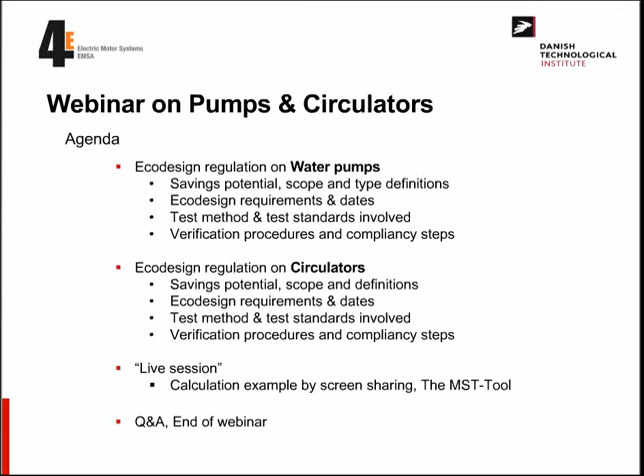As said, this will be on pumps and circulators, Ecodesign, and so forth today. The agenda will start on water pumps, talk a bit about the Ecodesign regulation, what's been regulated so far, and how we actually do compliance testing, at least in my part of the world, in Denmark, where my company has done a lot of compliance testing on motors, pumps, fans and so forth. I'll demonstrate how to perform it, both for water pumps and circulators, which are two very different things. Finally, I'll try to illustrate an example on the motor systems tool, live sharing my desktop session, which we hopefully will succeed with today.

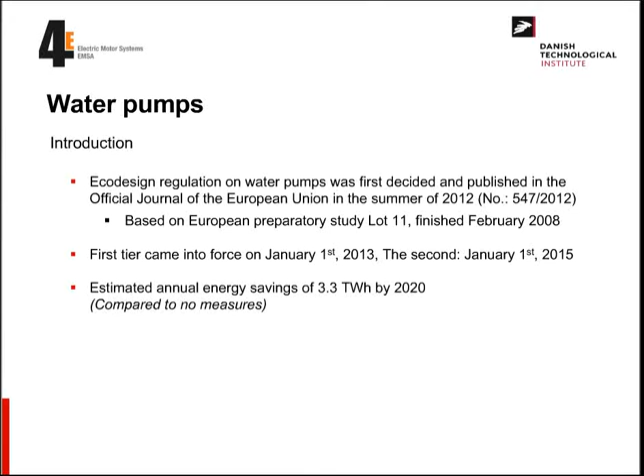From the preparatory study, we expect something like 3.3 terawatt-hour savings in 2020 due to these measures, if we compare it to no measures at all. And...

Another important thing to realize is that this regulation focuses on the component, the pump as a component, efficiency of the pump itself, in this case at 3 duty points. We do not take duty cycle or load profile into account in this regulation on water pumps. So that's good to know.

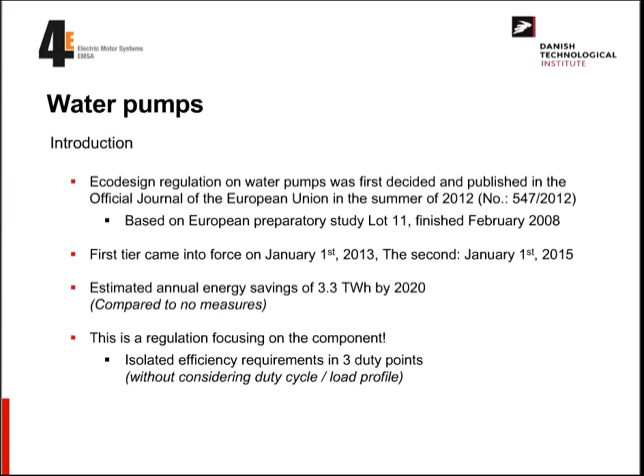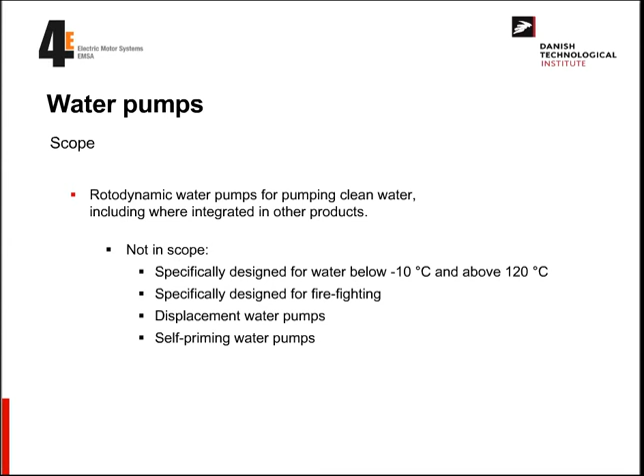The scope of the regulation is basically rotodynamic water pumps for pumping clean water, including pumps integrated into other products, so it's quite a large scope. There are a few exceptions: water pumps designed for water below -10 and above 120 degrees Celsius fluid are excluded, as are firefighting water pumps, displacement water pumps, and self-priming water pumps.

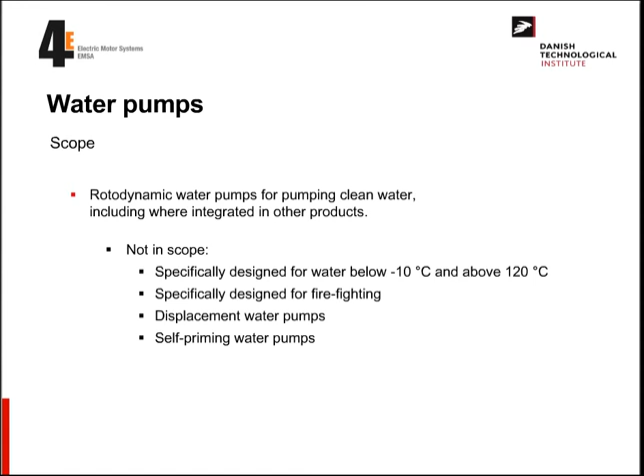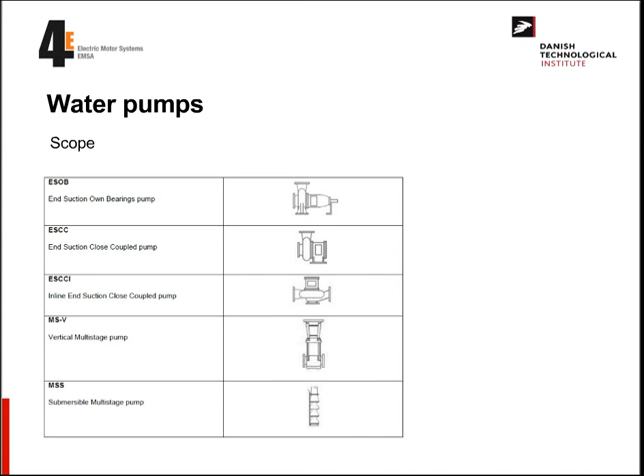When we look at the actual water pumps, there are 5 types recognized inside the regulation. 3 of these are what we call end suction pumps. The detailed limit is that they have to be designed for pressure less than 16 bars, with specific speed between 6 and 80 RPM. The rate of flow has to be above 6 cubic meters per hour, so the smaller ones are excluded, and the maximum shaft power is 150 kW, so the very large ones are also excluded. For 4-pole machines, the maximum head is 90 meters, and for 2-pole machines, it's 140 meters. So that limits the scope a little bit.

All of these 3 are end suction pumps, but the one at the bottom, while still an end suction pump, is placed in a vertical mode, so it's basically an inline pump in this case, but still an end suction pump.

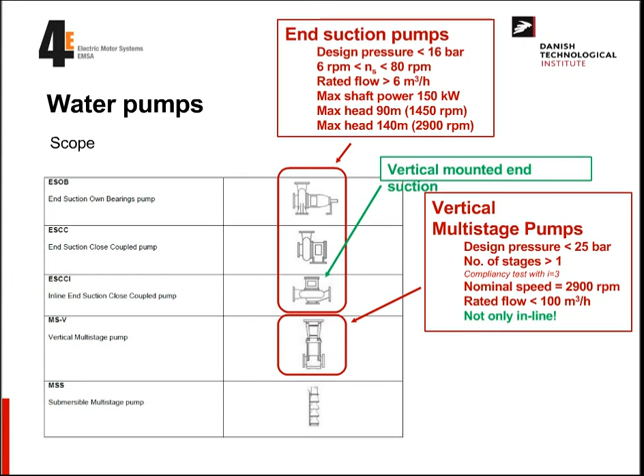Then we have the vertical multistage pumps, up to 25 bars of design pressure. The number of stages is of course above 1, as it's a multistage pump. When doing compliance testing, you have to take the model which has exactly 3 stages inside, and the text states that if you can't have that, you must take the closest number of stages above 3 when doing the compliance testing. These are only valid for 2-pole machines at 2900 RPM, up to a rated flow of 100 cubic meters. Also note this kind of pump isn't only inline versions; sometimes you see a top-bottom pump, which is still a vertical multistage, and this would be included as well.

The last type is the submersible multistage pumps, again with more than 1 stage. In this case, we have to test the model with 9 stages. It's only for 4-inch pumps, the 2-pole machines, and the water should be designed for between 0 and 90 degrees Celsius.

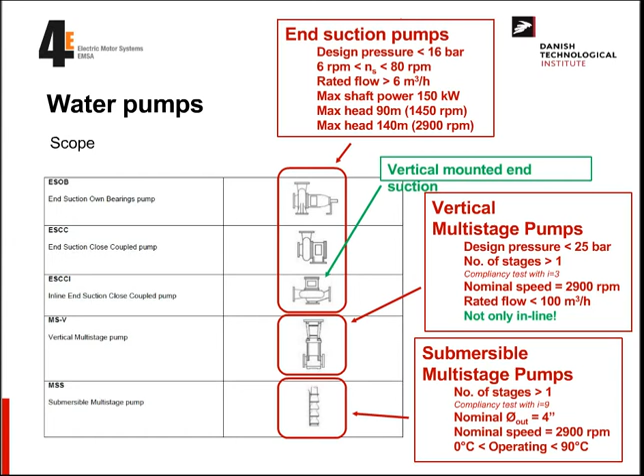Yes, so that's the scope. And then we have the requirements inside the Ecodesign regulation.

From January 1st, 2013, we need to have an efficiency on the pump at the best efficiency point, which could be calculated with a constant called C value at 0.1. This basically means we would exclude the 10% worst pumps on the market when applying this measure. Also, another duty point is the partial load point, again excluding the 10% worst. And we have a duty point in what we call overload, which again would exclude the 10% worst.

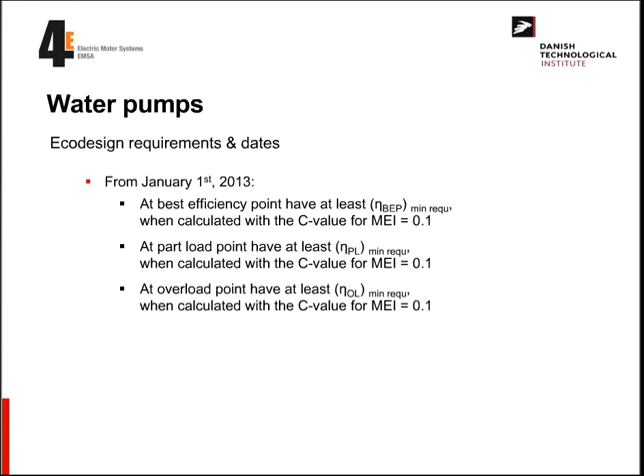On the first tier, we also had some product information requirements, a lot of them. I won't list them here, but of course you have to state the minimum efficiency index and year of manufacture and so forth.

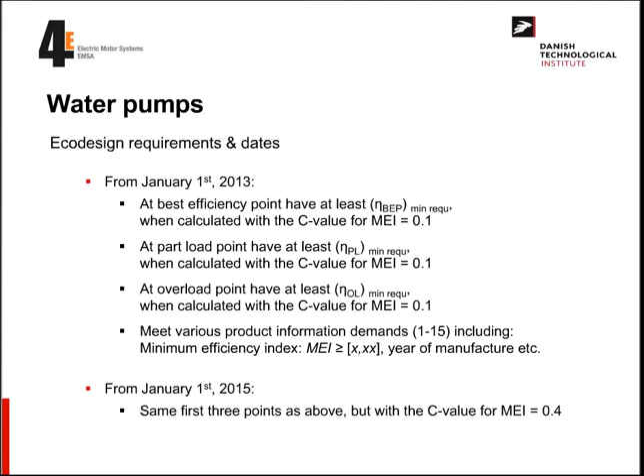In the second tier, which was this year, 1st of January, we basically had the same three points: best efficiency point, partial load, and overload. But this time we increased the demand to 0.4, which basically means we will exclude the 40% poorest water pumps from the scope. This is effective now in the European Union.

If we look at this on a graph, schematically, we basically find what we call the house of efficiency, where we have the duty point here for best efficiency, the duty point here for overload efficiency requirement, and here the duty point for partial load. If we put some rings on it, we can see these are the requirements. And if you look at the graph, you can see why it's called a house of efficiency. When I do the compliance testing, I have to have all 3 duty points measured above these requirements.

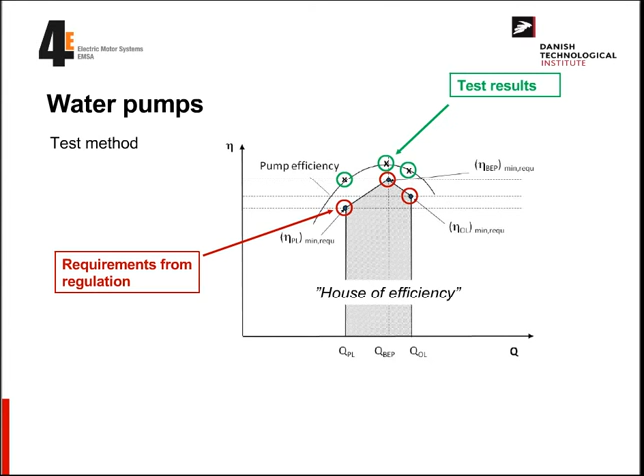Of course, there's a tolerance, but it needs to be above in all 3 cases.

The standard behind how to measure a pump in this case is, of course, ISO 9906 from 2012, which I often refer to as the Bible of pump testing, as everything of importance in terms of testing a pump can be found there - how to measure differential pressure, how to calculate, how to measure electricity and so forth.

So everything, all the measuring details can be found in this standard. And also on the European level, we have one very close to publishing called 16480. It's basically dedicated for the Ecodesign requirements, and it has inside cross-references to the actual regulation. I think right now it's in a voting stage on the European side, but I would expect it to be published in 2016 on the European level.

But of course, I've been working also in the development of the standard and have been looking quite a lot into this during the testing in the past.

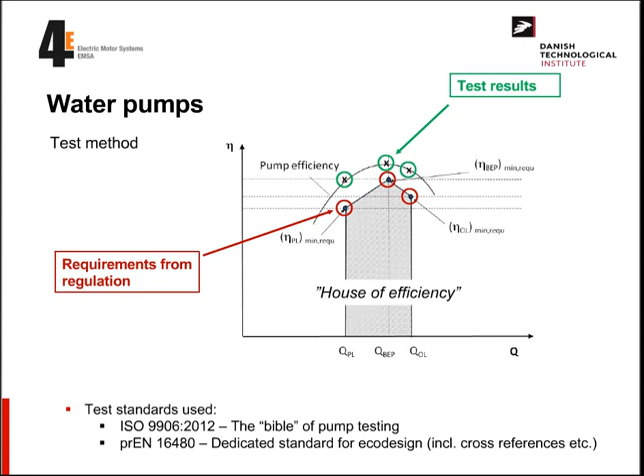At this point in time, I'm not able to see exactly where this duty point is, the best efficiency duty point, but I can guess it. And when I do that, I take a lot of duty points close to my guess because I need those for later.

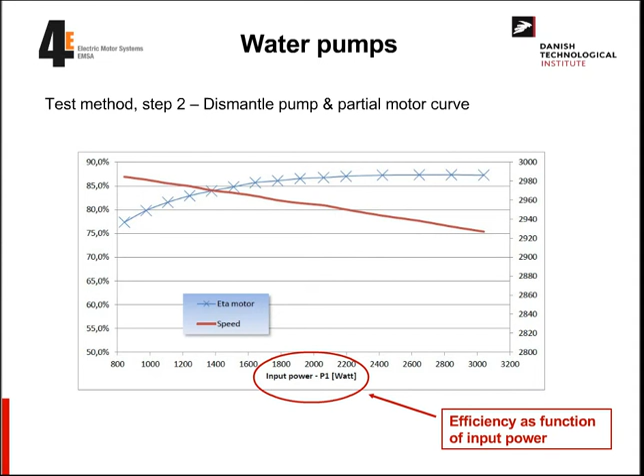It's very rare, not to say quite unusual, to be able to measure the shaft when handling a water pump. So we need to attack this problem from the outside, so to speak. In the motor test facility, we test the motor isolated, and we have a curve - again, the blue curve is basically the efficiency of this motor at different speeds.

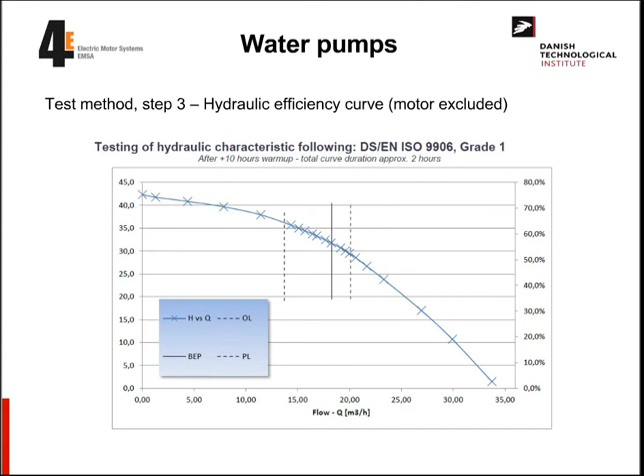Now that we have these numbers, we can go back to the full pump curve. When we have the full pump curve and know the corresponding efficiency of the motor in the pump at the duty point, I can deduct the motor losses from the total losses, thereby isolating the water pump efficiency completely. This is what I've done in this case.

All the red crosses are the actual measuring points, the duty points. The green line is again the mathematical regression equation, which I can draw, calculate, and even differentiate, so I can find the maximum of this curve.

In this case the maximum was at 18.29 cubic meters per hour. From this it's easy to calculate or look at the head at this duty point, which would be 31.74 meters. The flow for overload, 110% of the best efficiency point, would then be 20.11 cubic meters, and the partial load flow would be 13.71, at 75% flow.

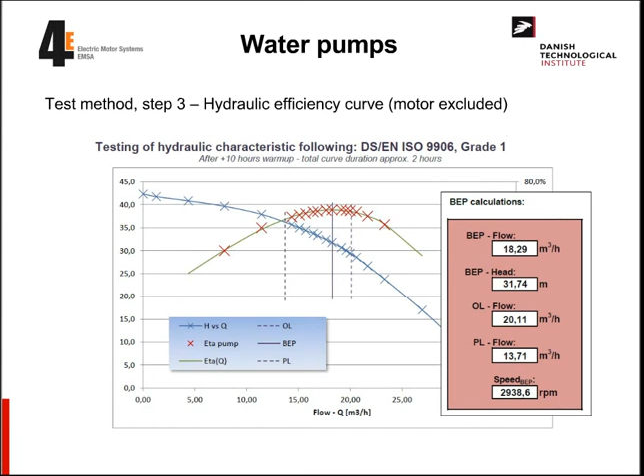We also have the speed of the pump in this case, so all these numbers I can use to do the calculation. From the regulation, I find this equation. It's a little bit complex, but you see you have x's and y's and x squared and y squared and so forth.

Looking at x, you can see this is the natural logarithm of the specific speed of this pump, and the flow and head from the best efficiency point are part of calculating the specific speed.

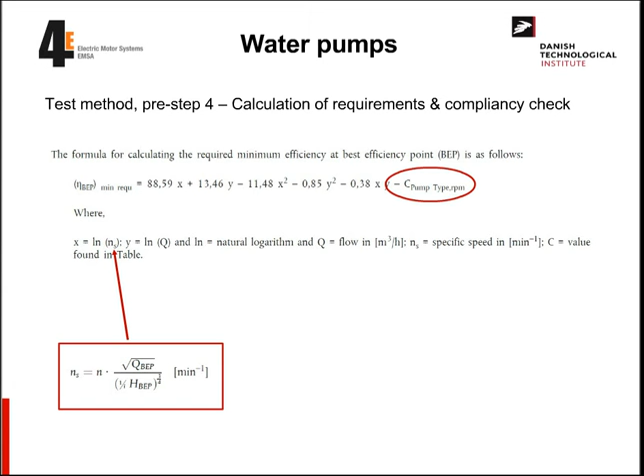Also an important part of this equation is the constant which we call C, because this constant is the one referred to in the regulation itself, as you saw earlier. This basically refers to a scheme which looks like this in the regulation.

This scheme comes directly from the European regulation. Here you can see the different kinds of pumps, the different types from before, the same as before, and you can see the variation in speed, 1450 and 2900, for instance between the end suction and own bearing pumps. For the requirement of Ecodesign, you need a constant.

In our example, a vertical multistage pump at 2900, at the first tier this constant would be 138.19, and in the second tier the same constant would be 133.95. This means that from tier 1 to tier 2 on the same pump, the requirement has now increased by 4.24 percentage points — an increase in the requirements for the pump.

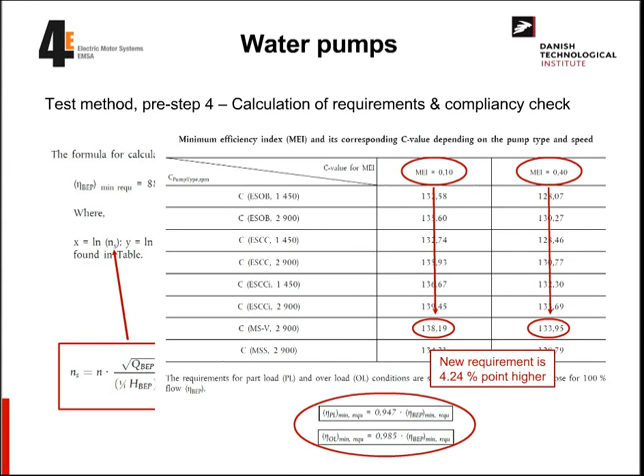Equally on the partial load point and the overload point, it's just a fraction of the best efficiency requirement, and therefore it follows in the same manner.

Going back to the actual calculation, this is part of the spreadsheet. First of all, we have the numbers from before, the 18, the 20, and the 13.7, and we have the head as well. The pump type in this case is the vertical multistage with 3 stages.

We can calculate the specific speed, which in this case is 35.7. We can calculate the constants X, Y, and C, and then make the actual equation, which gives us the requirement for this pump. Inputting all the numbers, I get a requirement of efficiency for this water pump of 59.8. You'll notice the constant I used, 138.19, comes from the first tier.

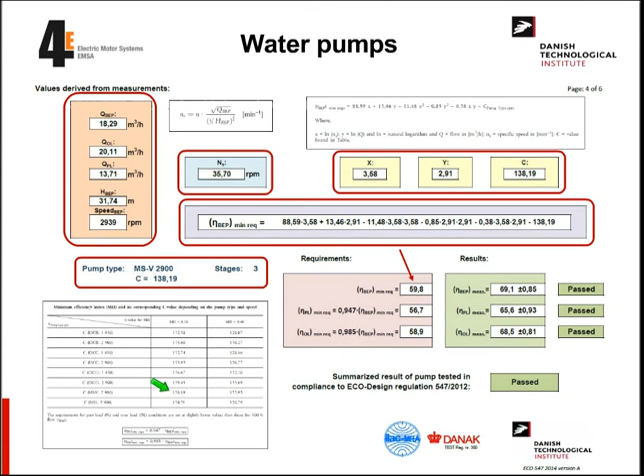It's actually down here as well, which is the 10% tier. If I zoom this scheme a little, you can see this pump had a requirement of roughly 60%, and I measured it at 69, and the same goes for the partial load and overload. So it passed all 3 duty points in this case, and the pump basically passed.

So in conclusion, you have to measure the entire system, pump and motor. Then you have to isolate the motor efficiency to calculate the pump efficiency, and then do the math and see if the pump passes, which it did in this case.

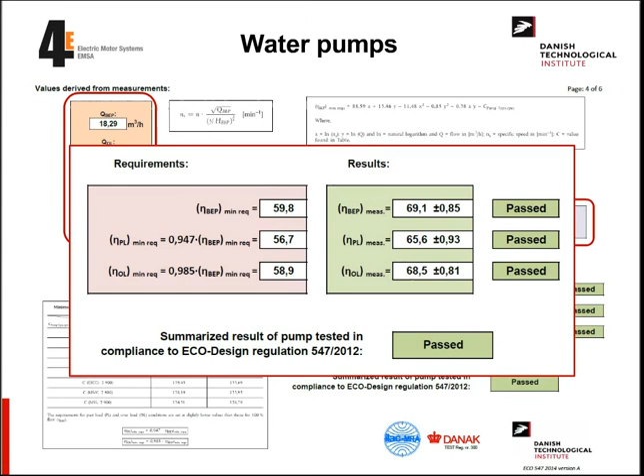Very good. Going to the circulators.

We have the regulation on circulators, which was decided and published already in 2009, at the same time as the motor regulation as well. The input for the circulator regulation also came from the Lot 11 study in Europe, which finished in 2008.

It started with the first tier on January 1st, 2013, just like the water pumps, but the second tier on the circulators was not until August 1st, 2015, this year. So it's not too long ago the second tier was active, but now it is.

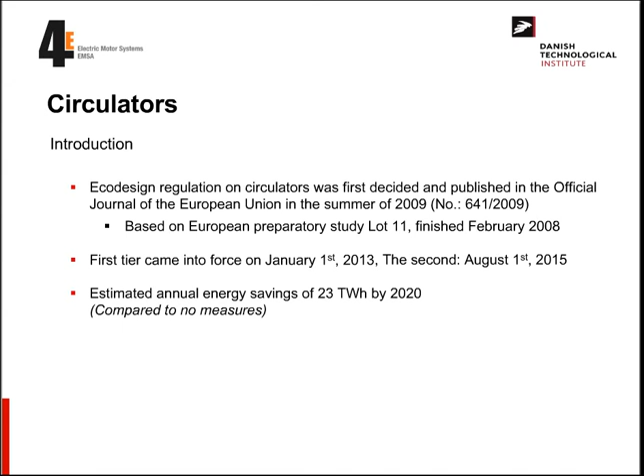Here you can see that the estimated energy savings from the circulator regulation is nothing less than 23 terawatt hours by 2020 compared to no measures. So the circulator regulation seems to have a lot more effect than the water pump regulation, but keep in mind that this was actually started - at least the intro to the circulator regulation - quite early, in 2009.

Another interesting thing on circulators is that the circulator regulation is basically what we call an extended product approach, meaning that a circulator is one small unit containing both a motor control and a pump, and thereby we can define different duty points and load profiles. So in the end, the circulator regulation is about a weighted power consumption in 4 duty points where you take load profile into account. In that sense, it's very different from the water pump regulation.

Unfortunately, we saw in Europe quite a lot of aggressive partners in the circulator community trying to cheat the regulation. It was so severe that we needed an amendment to the regulation, published in the summer of 2012, closing some loopholes. I don't think they closed everything, but we did close quite a lot. This regulation is called 622 from 2012.

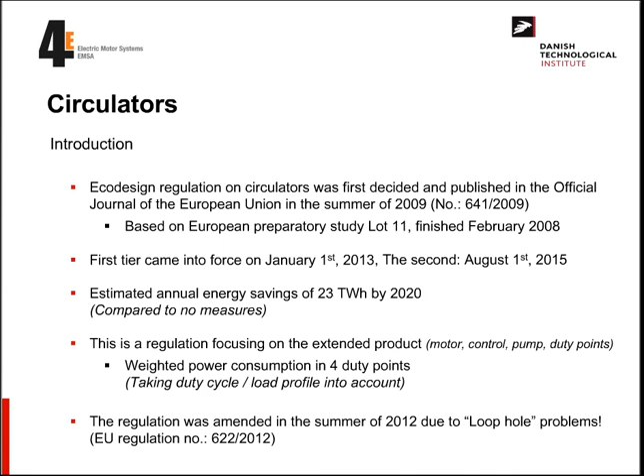The scope of the circulators is glandless standalone circulators and glandless circulators integrated into products with a rated hydraulic power from 1 to 2500 watts. So that's basically all circulators for heating distribution, a lot of it at least. What's not in scope is drinking water circulators - they have a requirement on product information, but not in terms of power consumption.

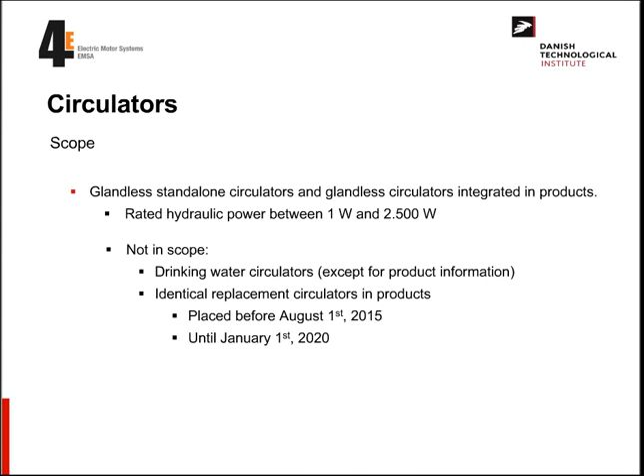Also not in scope is when you replace circulators with identical circulators on products that were placed on the market before August 1st, 2015. Until January 1st, 2020, these circulators are excluded from the regulation, but after this, they are then included.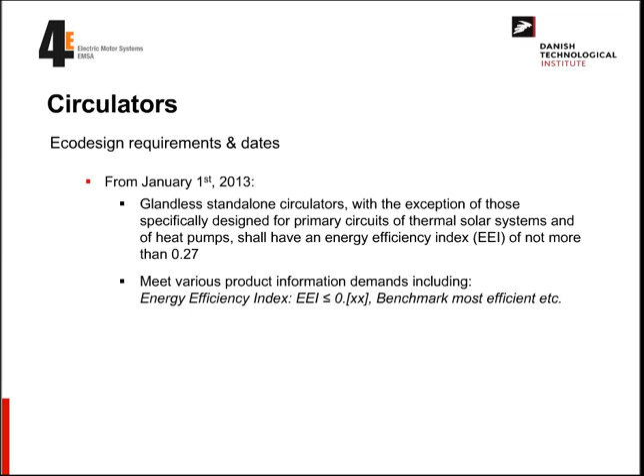The requirement is that the energy efficiency index in the first tier should be not more than 0.27, combined with a lot of product information - for instance energy efficiency index, benchmarks and so forth. From August 1st this year, the same requirement was set down to 0.23, and also integrated circulators should meet the demands on product information and so forth.

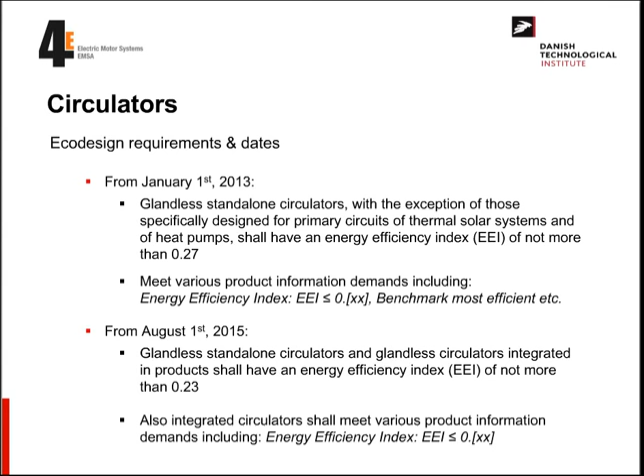So 0.23 is the requirement today in Europe, and the way we test this is basically in a proportional control mode on the circulators. You define a 100% flow and head duty point, then draw a line down to half the head at 0 flow, making 4 points at 25, 50, 75, and 100% of flow. Then you compare this weighted measured power consumption to a reference power. The reference power is basically calculated from the hydraulic power, which you find at the 100% duty point - I will show that later.

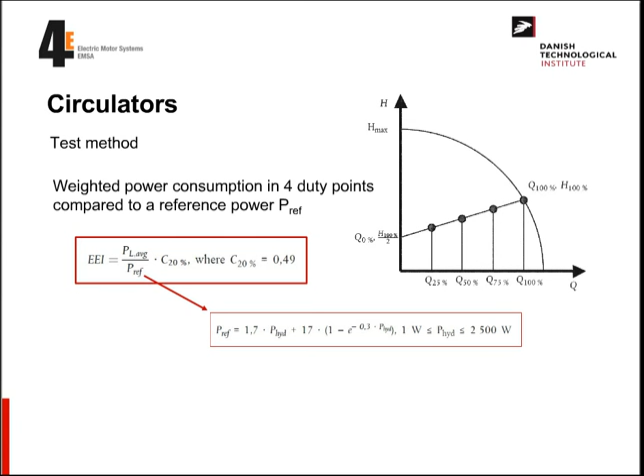Again, the standard for circulators is, of course, the ISO 9906 - the Bible for pump testing. This one is valid here as well. We also have dedicated standards in the European community called the 16297 series - parts 1, 2, and 3 - which are dedicated standards for circulators in terms of Ecodesign testing, including cross-references and so forth. Part 1 is the general how-to, part 2 is to calculate on standalone circulators, and part 3 is to calculate on integrated circulators.

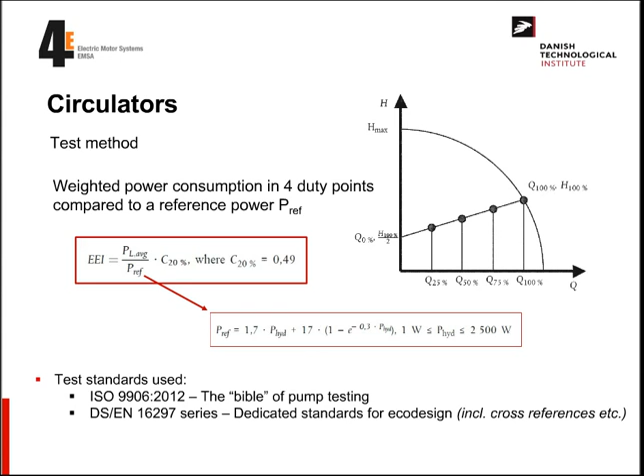What we do in my lab is first make a full pump curve. We warm up the unit overnight, more than 10 hours as stated in the standard, but we do it all night to avoid any run-in phenomena. In this case we cannot separate the motor efficiency because it's an integrated circulator, so we basically calculate the hydraulic efficiency already at this point in time.

Again, I have the crosses illustrating the duty points that I took, and again we have a lot of duty points very close to the maximum hydraulic efficiency point. In this case, the maximum hydraulic efficiency was at 1.67 cubic meters per hour on this small circulator.

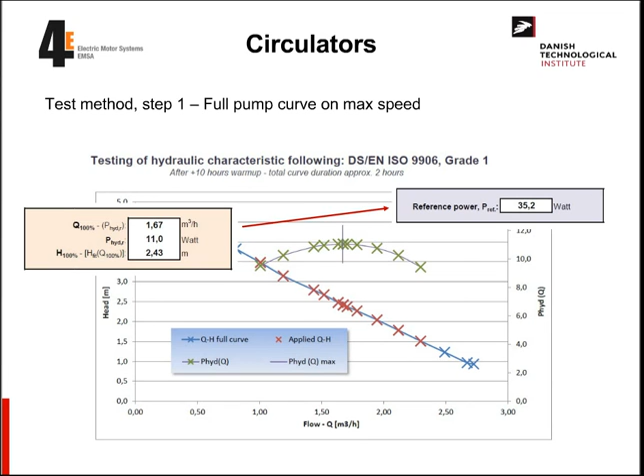In this duty point, we also had 2.43 meters of head. Knowing these two numbers, we can easily calculate the hydraulic power in this duty point, which is 11 watts in this case. We then use the 11 watts to calculate the reference power, as I showed you before - in this case, the reference power of this circulator would be 35.2 watts. That's a number we're going to use later.

The next thing we do is, and now I have zoomed the graph just a little bit, the blue line is the full pump curve here as before, and this cross here is the duty point that I just found, which is 1.67 and 2.43 meters of head.

I go in and I draw a line on half the head, and then I put in the 4 expected duty points as it says in the standard. I also have, from each duty point, a 5% limit and a 10% limit in both directions, because there are certain rules to which duty points you are allowed to use directly and which you are allowed to use as linear regression. But in this case, these are the four duty points that I want to achieve in the test.

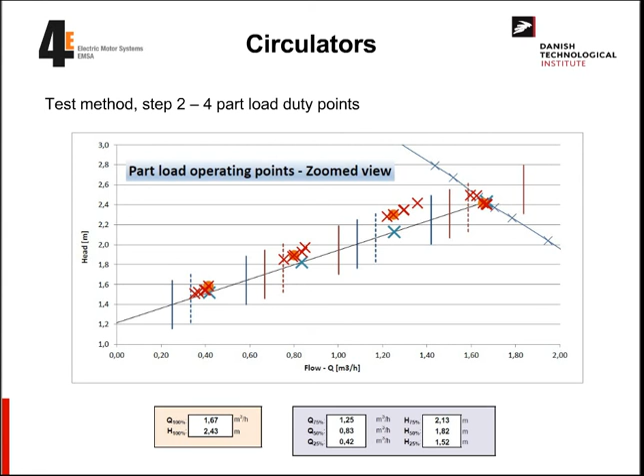This is what I actually tested. I programmed the circulator to do proportional control, and then we did a lot of duty points, as you can see. The orange dot is illustrating, sorry, I need the mouse here. This orange dot, and this one, and this one, and this one, is illustrating the duty points I actually used. These are the 4 duty points that I actually measured and are using in the calculation. What's important is the power consumption in the 4 duty points, which you see here.

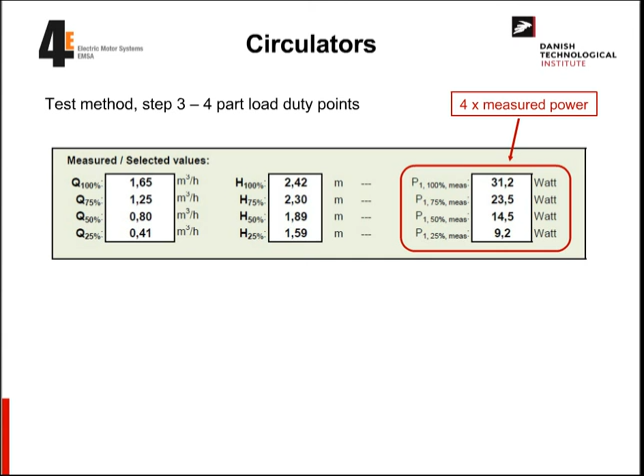30 watts, 20 watts, 23, 14, and 9. If we proceed a little bit in the calculation, we have to weight these powers, and for that purpose we have a weighting scheme which has been used for many years in the European community. We often refer to it as the Blaue Engel weighting, but it basically is an average on which flows a standard circulator is operating in a standard heating system.

That basically means that the flow of 100% is only operated on average 6% of the time. The 75% duty point is only 15% of the time. 50% flow is 35% of the time, and 25% flow is 44% of the time. So that's quite almost half of the time a circulator runs at 25% flow.

Therefore, we have to weight these power consumptions, and that's what we do in this circle here, going down to 1, 3, 5, and 4 watts. We can add these, which gives 14.5, and then we have to divide it by the 35 from before, and we also have to multiply it by a factor called 0.49, which again gives me a number called...

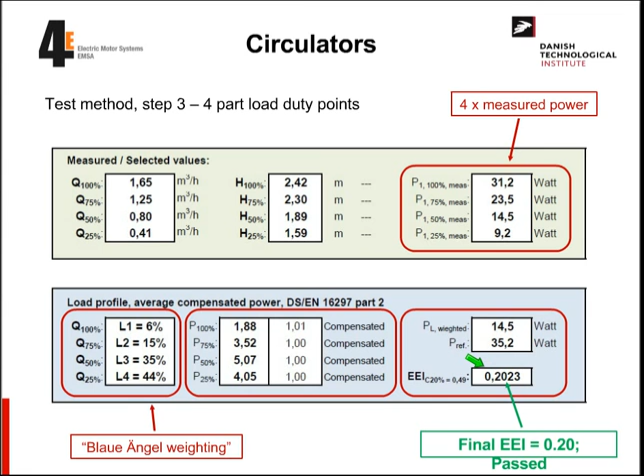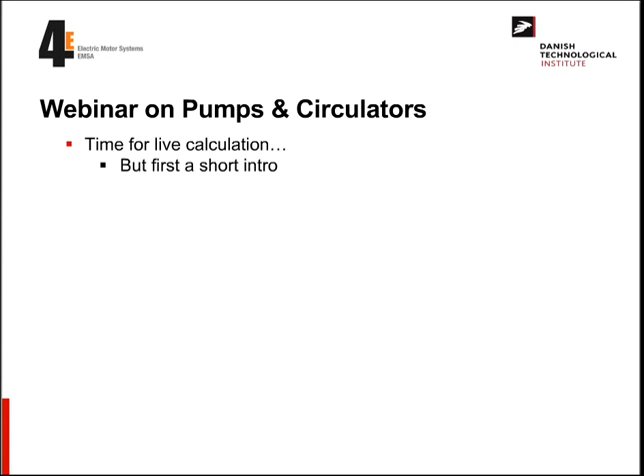I will now try to go to the live demonstration, but first I will introduce or recap.

If we look at the circulator, we have the 4 duty points looking like this, if you can recall that. Also recall the time in which the different flows are used: 6, 15, 35, and 44%.

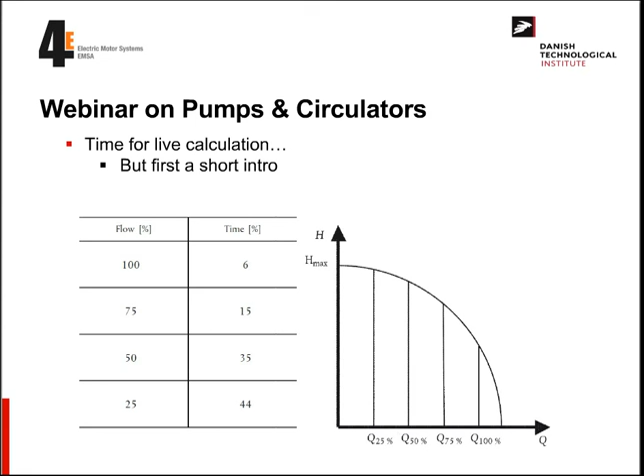The example that I want to use today, you will be able to find on our webpage later on. If we have an example of a circulator system where we have 6,000 hours per year running time, which is in the winter period, and it's closed in the summer period, then the spread of this flow would be something like 360, 900, 2100, 2,640 hours in this distribution of Blaue Ängel.

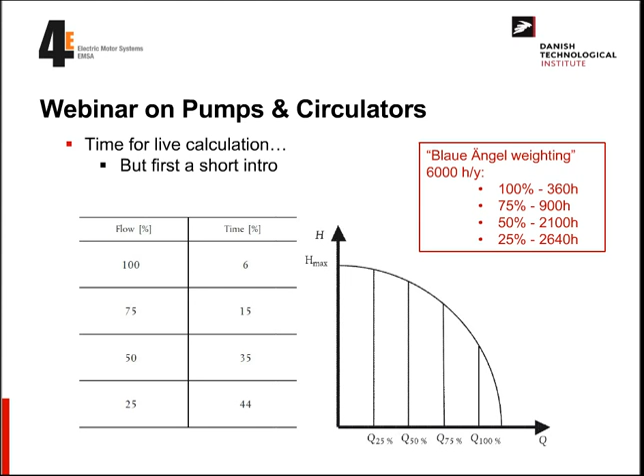And then I have selected a circulator with 3 fixed speeds for the example. In this case, we use the pump curve for the maximum speed, which is called number 3, and the related power consumption we find down here, going down this way, and also the related efficiency of the system looks like this.

And if I put in my duty points from the Blaue Ängel, it would look something like this. We have a maximum flow of 38.0, which gives me 75% of 28.5. We have a half flow of 19 and a fourth flow of 9.5. The corresponding heads we have up here, and the corresponding power consumptions we have down here. This would be my before situation.

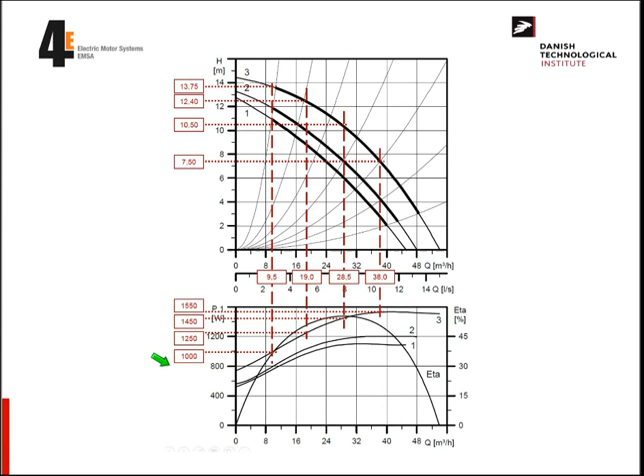In my after situation, I would select a pump with proportional control and also ability to change the speed of the pump, which of course is necessary. In this case, we will have and achieve the same flows: 38, 28.5, 19, and 9.5. But in this case, we have less head, of course, because we do the proportional control, and the corresponding lesser power consumptions would apply.

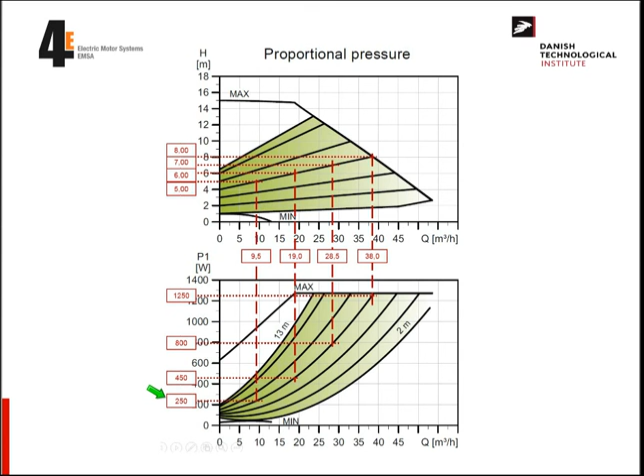So keep this in mind, and then I will try now to use the desktop if I succeed. Let me see.